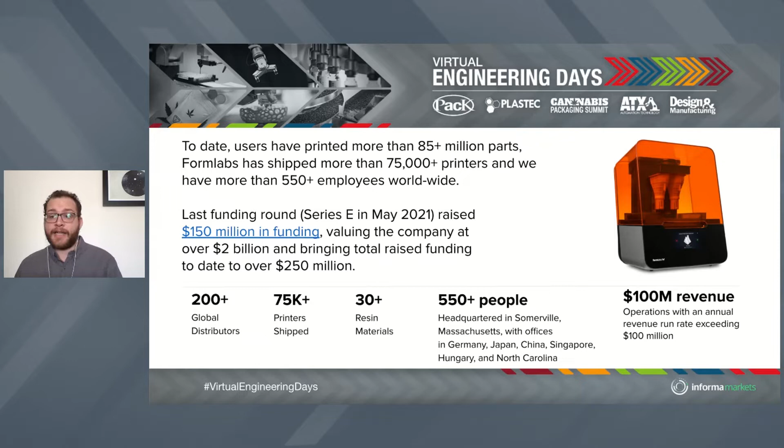It's a really exciting time for us, and people are really seeing the value that an accessible, available 3D printer can add to their business now that it's easier than ever to integrate it.

I want to give a quick vision into the history of the company, a sidebar to talk about what I mean by SLA becoming more available and accessible. This was a technology that came about in the 80s and has been around since then, but only with the Form 1 and 1 Plus, which were pretty tightly joined in the early 2010s, did it become something that could be done on the desktop.

We've really made our name making professional, highly usable, extremely accessible machines that deliver professional quality, similar to what you'd get in an industrial machine—something that in the past would involve a lot of dedicated floor space, dedicated facility planning, and highly trained operators. You can see we've progressed and built on this theme, starting with the Form 1 and 1 Plus, moving to the Form 2, which was really the product that got a lot of adoption, saw a lot of circulation, and got our name out there.

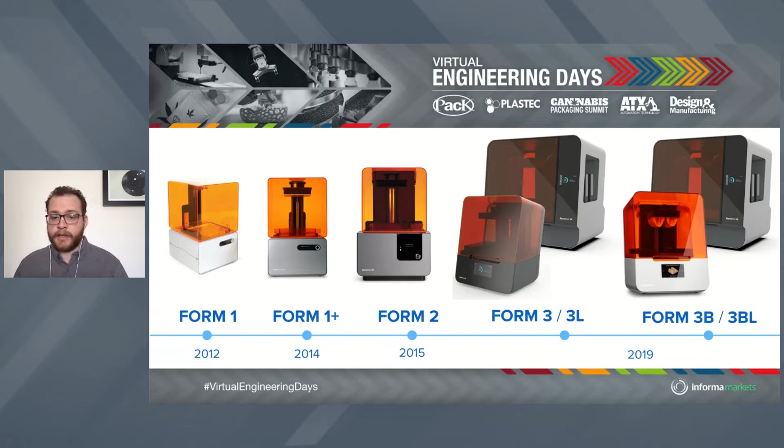And now we're on the 3 and 3L series, and the 3B and 3BL are just our medical and dental models of the same printer. So we've expanded, we've gone to a larger format, we've gone to newer technology. I could bore you with the details, but this really is an evolving space in 3D printing, and it's great to see how excited people have been about it.

So here's a basic overview of our catalog now, in terms of what we produce, what kind of hardware we offer. So 3 and 3B, same size, but they differ in terms of the applications they're used for. 3L is another thing we launched recently, a large format machine.

Wash and cure are accessories for those, for post-processing. And then Fuse 1 and Fuse Sift, which I'm going to talk about more in depth later in the presentation, are our first foray into SLS, that's selective laser sintering, a technology that uses powdered plastics. We focus on nylons, at least for now, and use a laser to sinter those into solid parts.

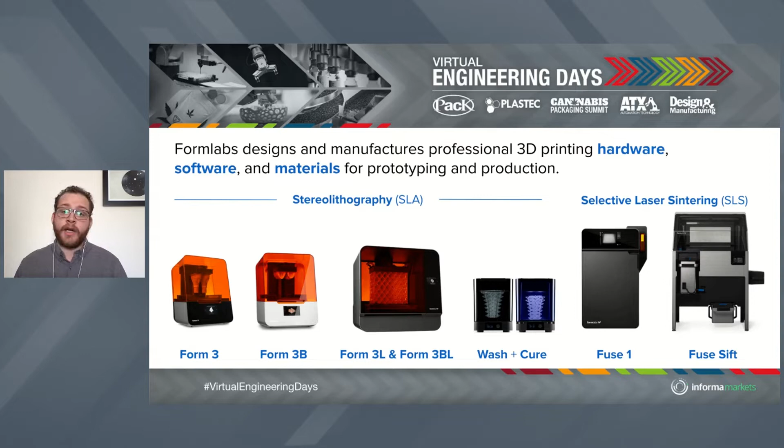If you've gotten 3D printed parts for something functional or end use outsourced before, through either a partner location, a vendor of yours, or a manufacturer that offers on-demand 3D printing, SLS is likely a technology you've explored or maybe seen parts from. It's getting a lot of adoption in the industry as a rugged, end-use type of manufacturing.

This is our mission statement, and I want to bring this in here just because I think it's a good way to frame what Formlabs is all about, but also as we talk more about where we see the industry going, our vision for the future.

This idea that anyone can make anything - that's just increasing accessibility to the technology, and not just by offering really inexpensive things, but by offering really powerful things that don't require a lot of upfront investment in terms of your time, labor, and specialized skills to be able to use like a professional user. For a long time, especially in the early 2010s, you saw a boom in media coverage of 3D printing.

You saw people excited, saying everyone's going to have a 3D printer on their desk. It's just going to be like an inkjet printer or a laser printer. Everyone's going to have one at home. It's going to be really great.

And it was sort of sparked by the fact that a lot of other companies' printers were coming out at such a low price point, but they weren't really competitive in the way that anyone could make anything with them. They were still catering very much towards a hobbyist consumer sort of mindset. We feel like we've really elevated desktop 3D printing to the point where it is a serious technology that can be scaled up and brought into production applications for true end-use parts.

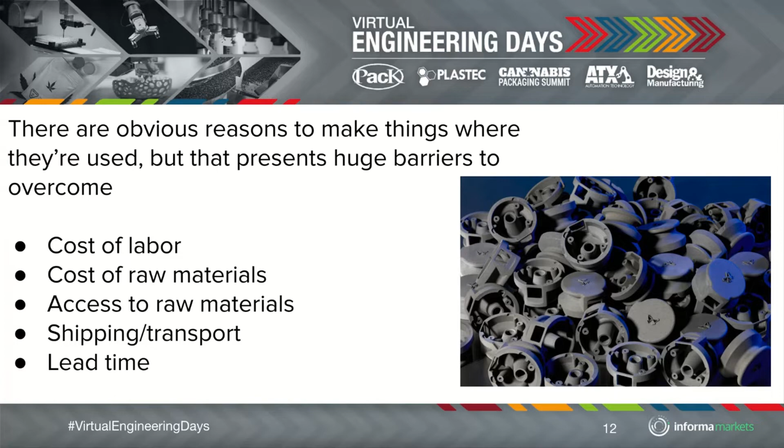We produce them ourselves, in-house, and we do it in a fairly small area. I'll show you some pictures of installations later, with relatively few operators. Labor cost is not a huge concern for us printing these because the printer does so much of it on its own. So it's great when we're bringing new products to market, or looking for the most effective way to produce something, to look at a quote or lead time from a vendor and say, actually, I think it's more effective for us to just produce it ourselves. We can very easily, very quickly, not even tool up, just get the equipment we need and go straight from a model to a part.

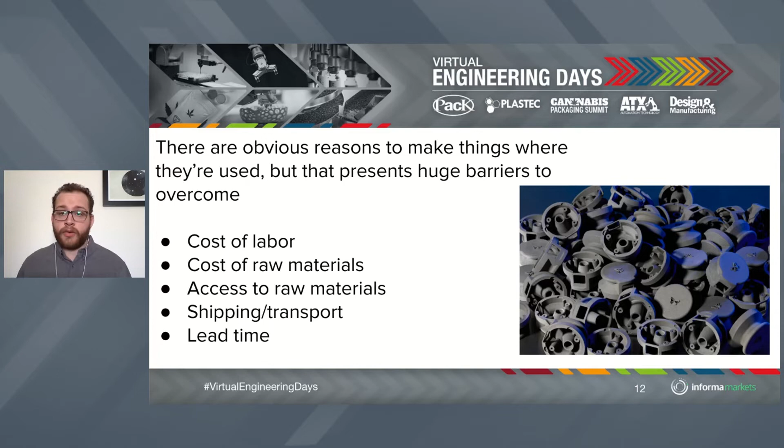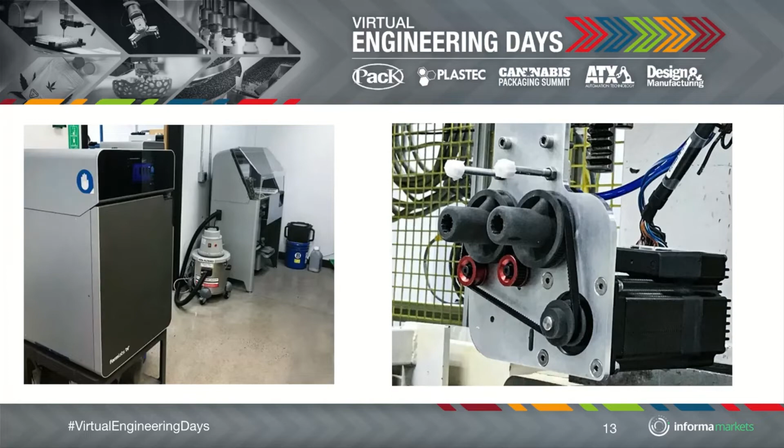This is two 120-volt outlets on a shop floor that they already had, and they can produce all the stuff they need to keep their line going. On the right, they produced components for a machine they use every day. They were machining those out of aluminum as they needed replacement or needed to swap them out prior to this. By having a Fuse on site, in-house, ready to go when they need it, they could produce parts without going through an external supplier or a machine shop. They could just produce parts as they needed them, which gives them a lot of flexibility, but also a lot of security that their manufacturing facility won't experience downtime if something breaks or they need a replacement part.

Again, this goes back to that idea of control - controlling your supply chain, but also controlling your facility. You retake some of that control by having a really agile manufacturing tool like this.

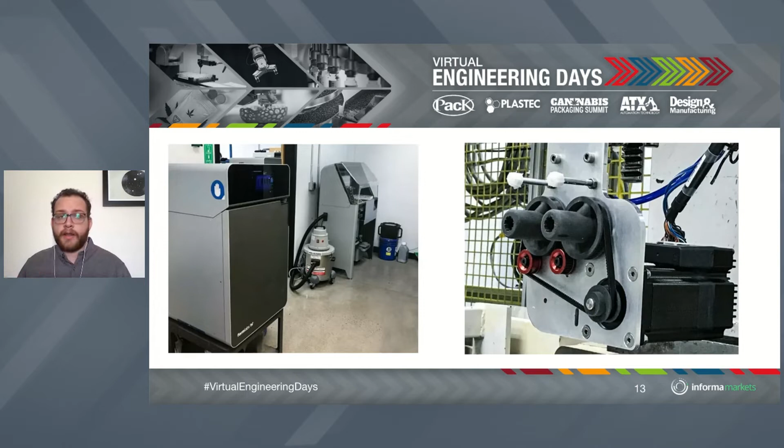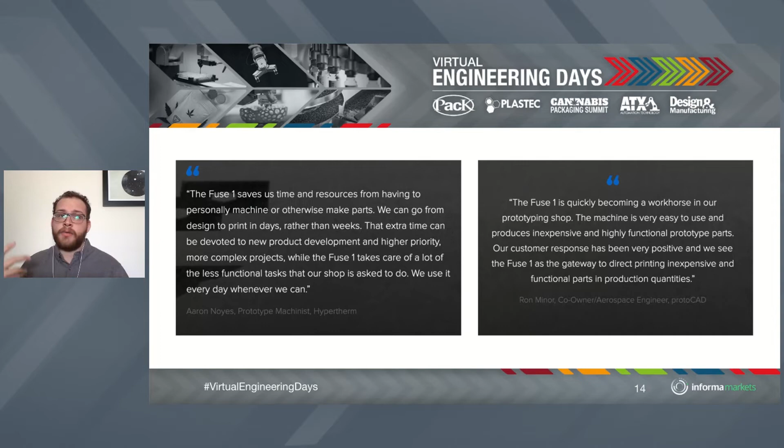Everyone likes to talk about making things where they're going to be used. You want food to be grown where it's going to be eaten. There are a lot of ideas about this decentralized model, producing things where they're going to be needed. 3D printing is the ultimate for this when we talk about plastics and metals, things that are difficult to make complex parts with, because you can set up one of these installations with a little bit of labor, time, and floor space, and produce a huge portion of the things you need right where you need them.

So I'm starting to dwell on the Fuse 1, talking about this technology, and I recognize a lot of you probably haven't seen the product or aren't familiar with it. Maybe you've never heard of SLS, Selective Laser Sintering. So I want to take a step back and talk about what the system is, what it looks like, what an installation consists of.

We love to throw this line out at Formlabs: we're doing for SLS what we did for SLA. I've heard it to the point where it sounds a little cheesy, but it's very true, which is why I include it in these presentations and say it to clients and people we're working with.

If you think back to earlier in the presentation when we talked about SLA stereolithography and its evolution, it used to be high performance at a high cost. That high cost is machine cost, but it's also time, labor, expertise - it's all of the things. It's floor space, it's setting up your facility, it's building a process around it. We looked at that and said, this is a great technology, but it has the same limitations that a lot of traditional manufacturing technologies do.

We're very constrained by labor, very constrained by location, very constrained by having a facility that can support it in terms of infrastructure, floor space, head count, all of these sorts of things. Why don't we build something that can deliver similar quality, similar throughput, all of the same performance that you've come to expect from the technology, but in an unobtrusive, non-disruptive package?

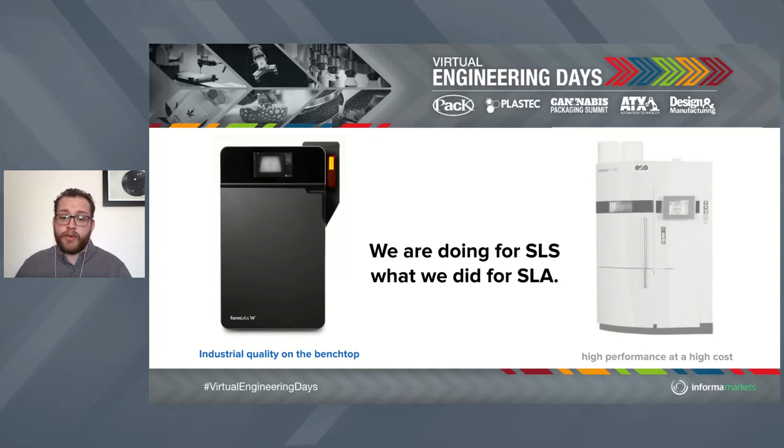And that's really what the Fuse is. You see this line: industrial quality on the benchtop. It really is something you can sit on a benchtop, in the corner of your office or whatever space you've got, and still get parts out that would rival anything you get from one of your existing vendors.

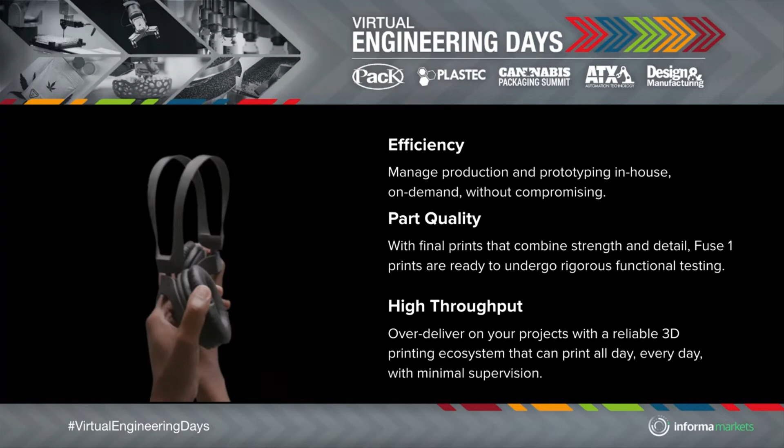It's a really high quality material - nylons in general, our formulation of nylon 12, nylon 11. These are not like a lot of the materials people have come to expect from 3D printing if they're only exposed to FDM, SLA - technologies that have historically been more accessible. Nylon, you guys all know the name - it's an end use, really robust, high performance material, and being able to print it without compromise is a huge game changer in terms of integrating 3D printing.

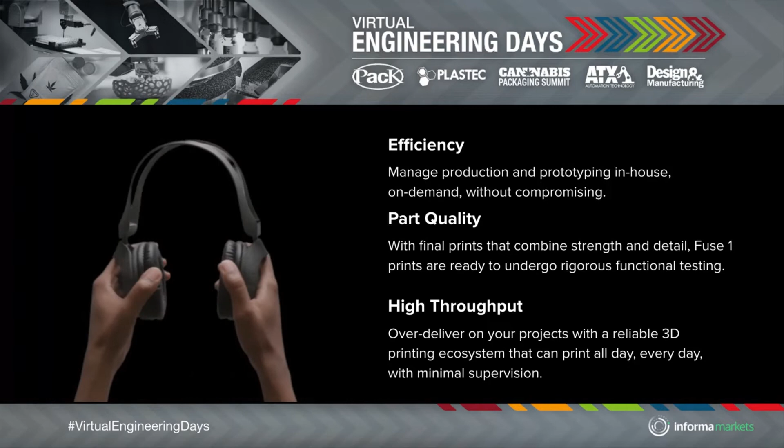A few bullet points here: efficiency - this ties into just having something in house, but you can run these machines back to back to back, which ties into high throughput. We have people running these in manufacturing facilities. We're running them ourselves in production for end use components of one of our products, and we're not doing it to be cute or fun as a marketing talking point. We stood up an installation of these printers because it was legitimately easier for us than going to injection mold it and integrating that into our supply chain. In the middle there, part quality - the parts you're getting out of this are true end use parts.

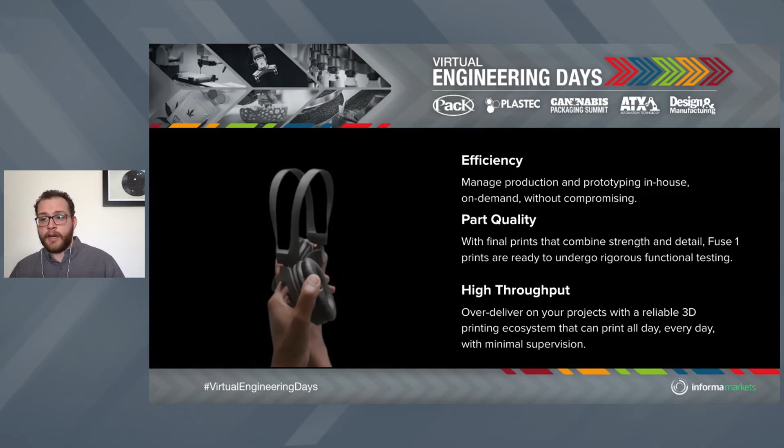I want to stress this because I think there's a perception of 3D printed parts as being weak, as being of low quality, as being generally unusable for real things. When we're talking to people interested in adopting Fuse, the interest is always, can I use this as my final product? And the parts really do hold up to that.

In terms of some selling points, some reasons people are excited about it: accessible price, known materials, production applications.

I want to take a step back and talk about the journey for a lot of people in getting this in-house. We'll talk to a lot of people and they'll say, okay, I know what nylon is, I understand how it works, I understand that it's going to be suitable for my application. But if I want to produce it in a traditional way, it's going to involve a high upfront cost. What's exciting about the Fuse is you can start with a fairly inexpensive upfront cost, a fraction of what it would cost to do it either with injection molding or with a traditional industrial SLS machine.

The nice thing about having a low upfront cost, a lower priced machine combined with affordable materials, is it makes it very easy to scale. I'll show you again a couple pictures and examples of people who are scaling with us.

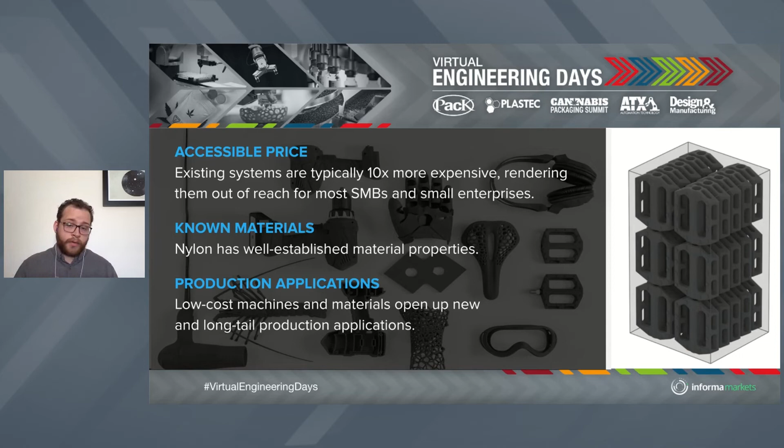That's it, that's what you need. You need enough space to sit these things. About 40 inches wide for one of them, about 30 inches wide for the other. So 6-7 feet on your shop floor, and you can have your entire manufacturing solution against one wall.

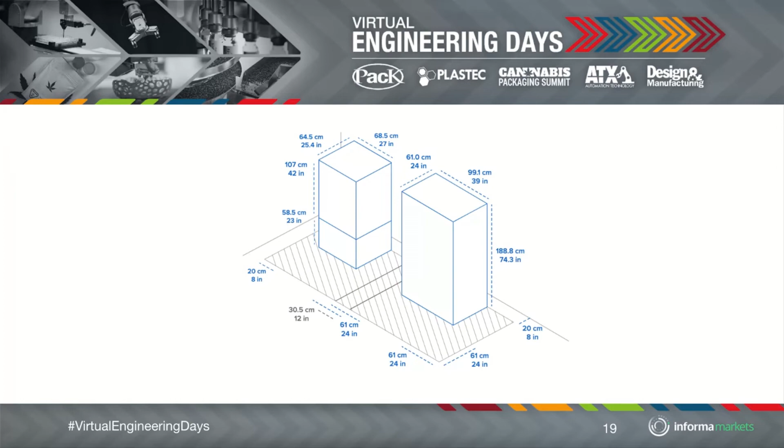We're going through a build out right now at our headquarters. I run a few Fuses in a converted conference room, under 200 square feet. We've got 3 Fuses, 2 Sifts in there, and we could probably jam more in if we needed to. We managed to set it up in a couple days, because it's so easy to move these things around and set them up where you need. Once our construction's done, we'll move them back out, and I'll put them back where I need to. It's not like setting up a CNC or something where you're thinking about the entire ecosystem around it. This really fits where you need it.

Talking about producing things where they're needed and barriers to that, you can think of that on a macro scale, right? Am I producing it in the right country? Am I producing it in the state? Am I producing it at one of my facilities as opposed to someone else's? But you can also think about it as sections of your facility, or facilities within a company. I hear from a lot of people, we would love to do SLS printing, but our mothership location 3 states away, they've got the 3D printing stuff because they've got the floor space for it.

They've got the headcount, they've got the facility for it, so we just send things to our sister location or whatever it is. And they're coming to us, they're interested because they can take back a little control even within their company and set it up, because they've got a couple power outlets, they've got 7 feet on a wall that they can set these things up side by side. It's really exciting to them, even at that narrower scale, not where they're bringing stuff home from China or Vietnam, just where they're bringing stuff to their facility from another one.

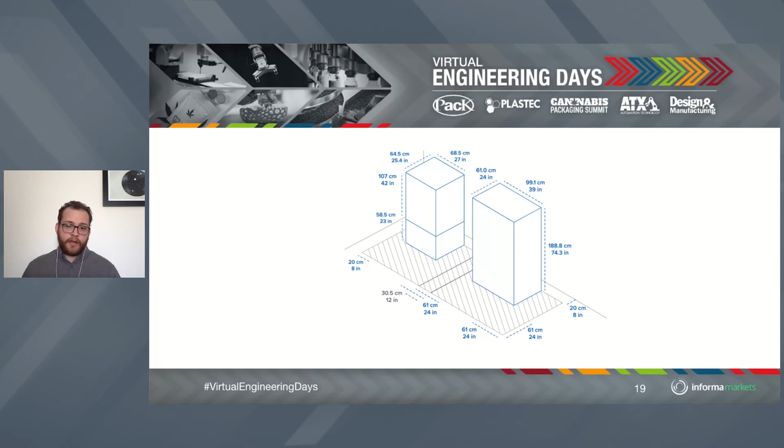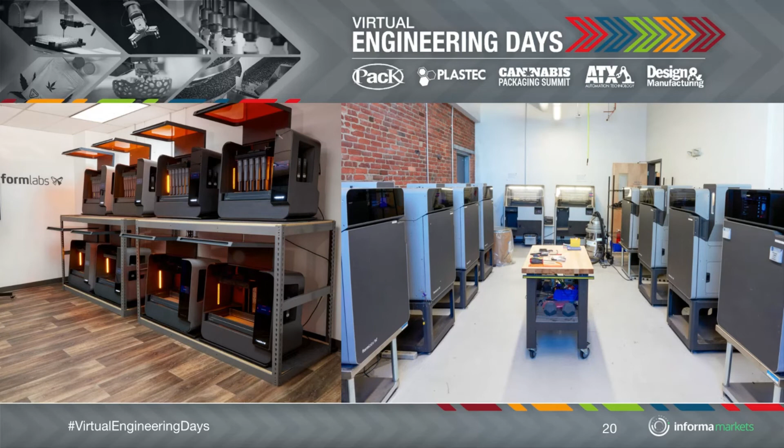So here are the pictures I promised you. This is what a manufacturing facility looks like with Formlabs 3D printers. Doesn't look that impressive, right? Doesn't look that huge, but this is what a high volume facility can look like. These are both setups that we've got and that we've been operating in Formlabs HQ, which is again Somerville, Mass, just outside of Boston.

What you've got on the right is a room we stood up with 8 Fuses and 2 Sifts. By doing this, we can produce literally thousands of parts every week. Right here, we have one operator who comes in, checks everything, uploads files, pulls things out, dusts the parts off and throws them in a bin. But these things run overnight without supervision, they'll run 7 days a week, back to back jobs.

It's very easy for us to say, oh, we need additional capacity. We need to print more parts for Fuse. We need to print more samples to send to prospective users. We need to print more of whatever we need. We'll use it for internal prototyping, for product development. We could decide at lunch that we need to produce 1,000 of these this week, and by the end of the day, we've got it going. That's a real game changer, even for us as a 3D printer company who's thinking about this all the time. Having Fuses around has really changed the way we do things.

On the left, 3L, I mentioned this machine earlier. Again, it's a large format machine. You can make dozens, hundreds of parts a week on it. And these are parts that sort of mimic injection molded quality, right? Extremely smooth, precise, accurate parts ready to show to your marketing team or your customer. And again, doesn't take up much space. That's also 8 of these machines, and you can see we've got it on a couple shelving units in the side of a decidedly office type space, not really an industrial sort of facility.

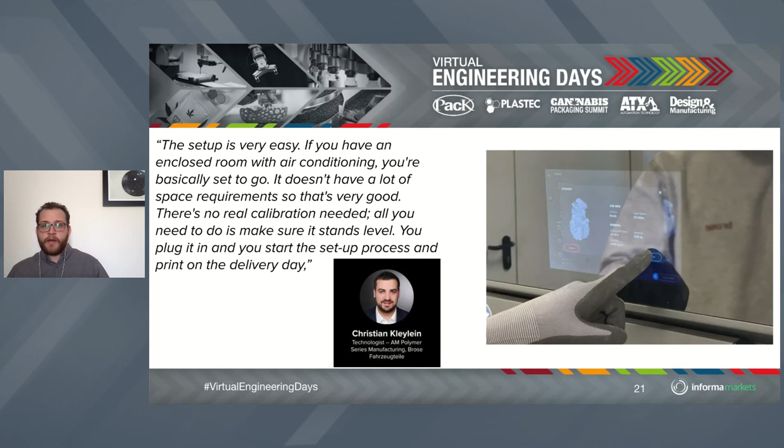We get calls from people all the time: hey, I have a project deadline, the project's in a month, how soon can I start producing parts? And we look at the calendar and we go, I don't know, 2 days, 3 days. How soon can your people be ready to take delivery? That's a paradigm shift, because there's no tooling involved. We're not quoting minimum quantities, we're not trying to figure out batch manufacturing. Once you've got the equipment, you're ready to go.

The other one I want to highlight is from Print Parts, which is a great service bureau, great contract manufacturer in, I'd say, unlikely locations. They're in Manhattan. How many people would think, oh, I'm standing up a manufacturing facility, I want to do it in Manhattan, I need the floor space, let me buy some real estate in Manhattan? But these guys did it, because it's a great location for them and for their customers. It makes a lot of sense to have some manufacturing, because there is still a lot of industry in New York.

What was really exciting to them is they were running a lot of smaller format printers and having great success with that. Their customers were looking for SLS parts, these rugged end-use nylon parts to use in their products. And Fuse was the solution that would fit in the allotted floor space they had in their facility without a whole lot of interruption.